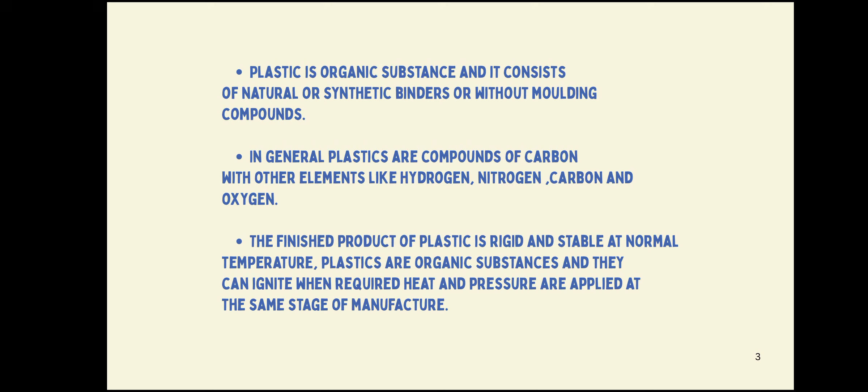Compounds. In general, plastics are compounds of carbon with other elements like hydrogen, nitrogen, carbon, and oxygen. The finished product of plastic is rigid and stable at a normal temperature. Plastics are organic substances and they can ignite when required heat and pressure are applied at the same stage of manufacture.

Polymerization. Plastics

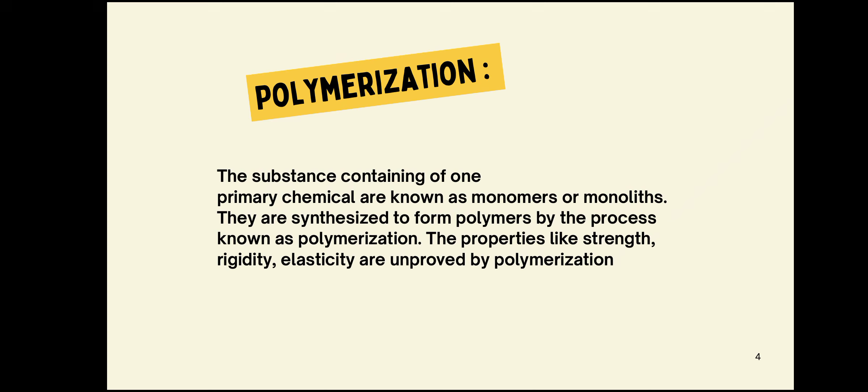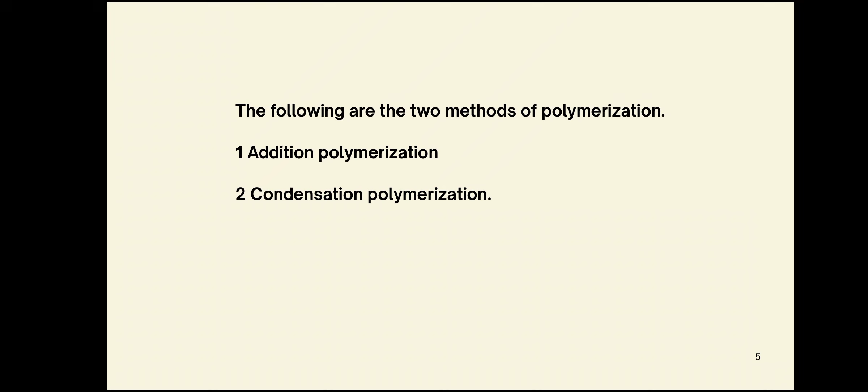Addition polymerization. In this method, different molecules join together and the molecular weight of the resulting polymer is equal to the sum of the molecular weight of the reacting molecule. This process involves three stages: beginning of the process, expansion of the chain, and end process. The polymers obtained in this method are polyethylene, polypropylene, polyvinyl chloride, polystyrene, polyacrylates, etc.

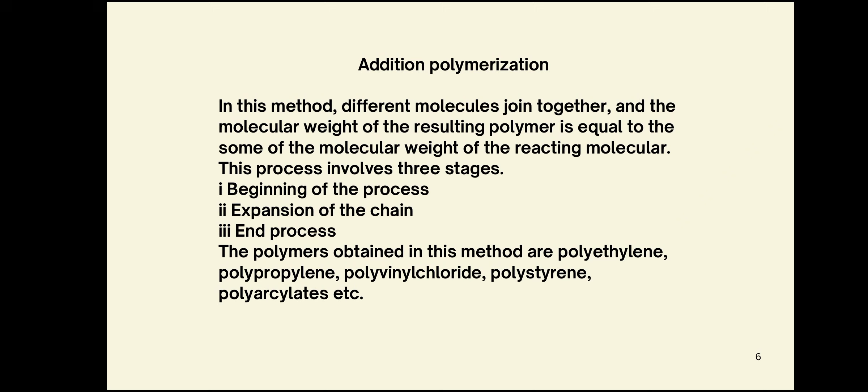Condensation polymerization. In this method, low molecular substances are removed from the high molecular substances formed from a large number of identical or different molecules. The reaction proceeds with an evolution of ammonia, hydrogen chloride, and similar other low molecular substances. The polymers obtained by this method are phenol formaldehyde, carbonate, melamine formaldehyde, etc.

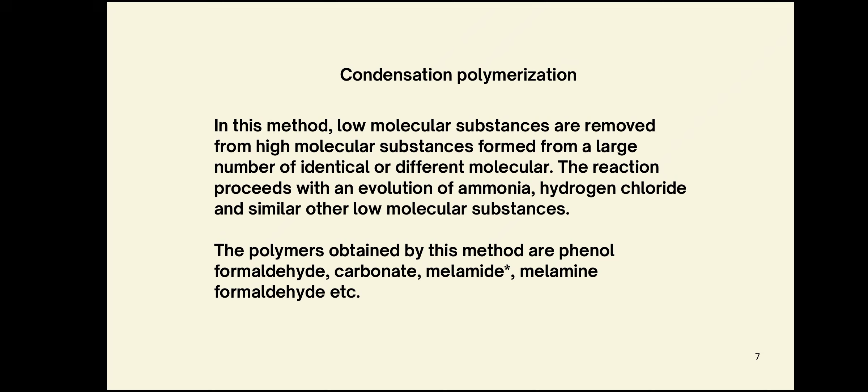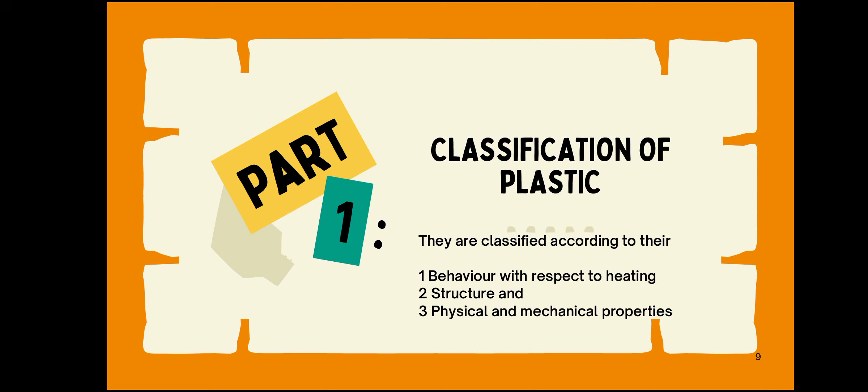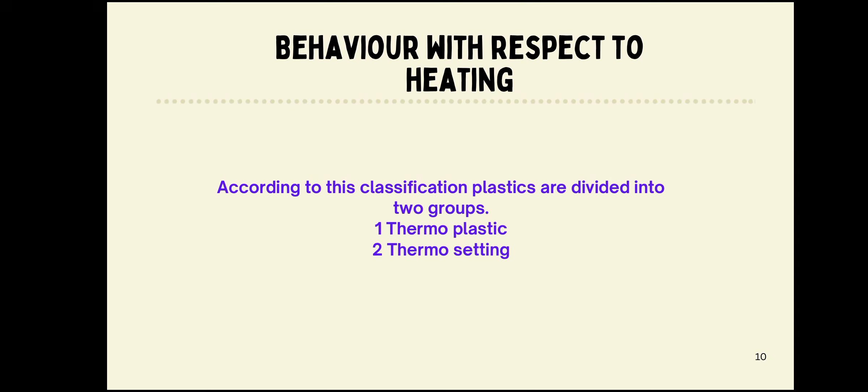Next one is classification, types and uses. Classification of plastic. They are classified according to behavior with respect to heating, structure, physical and mechanical properties. First one is behavior with respect to heating. According to this classification, plastics are divided into two groups: thermoplastic and thermosetting plastics.

Thermoplastic. The thermoplastic or heat non-convertible group is the general term applied to plastic which becomes soft when heated and hard when cooled. The process of softening and hardening may be repeated for an indefinite time, provided the temperature during heat is not so high as to cause chemical decomposition. So it is possible to shape and reshape these plastics by heat and temperature. The advantage of this variety of plastics is that the scrap obtained from old and worn out articles can be effectively used again.

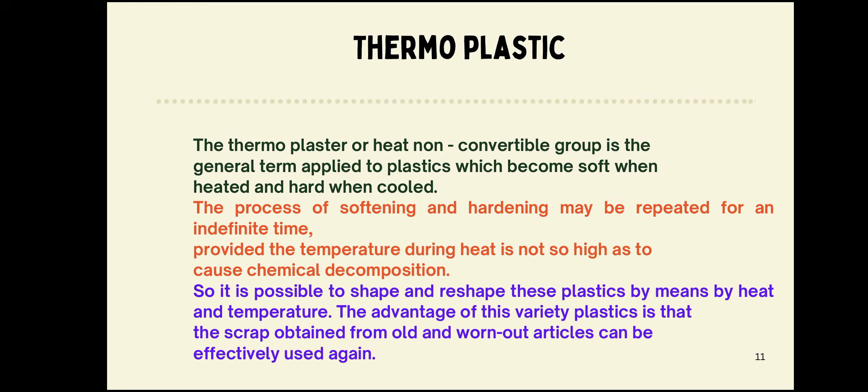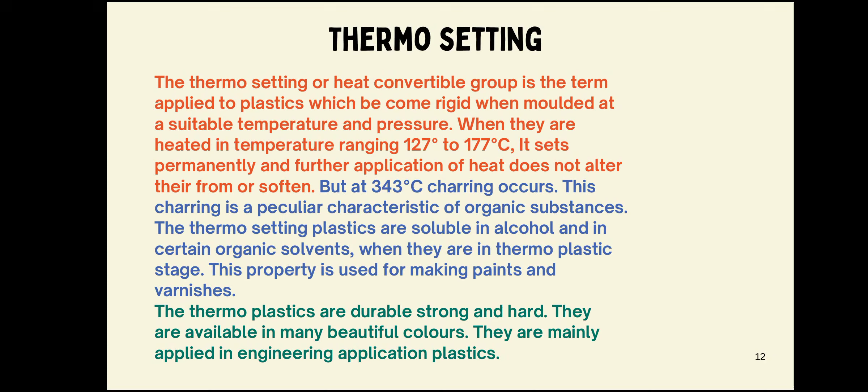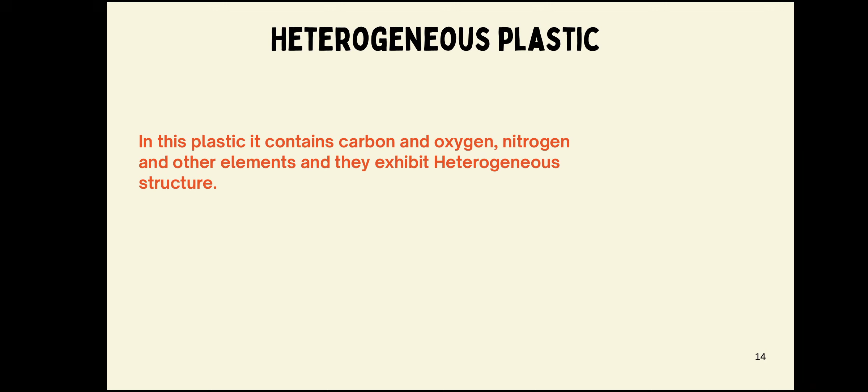Homogeneous plastics. The plastics of this group contain carbon atoms and they exhibit homogeneous structure. Heterogeneous plastics. This plastic contains carbon and oxygen, nitrogen and other elements, and they exhibit heterogeneous structure. Physical. Homogeneous and heterogeneous plastics are classification according to structure.

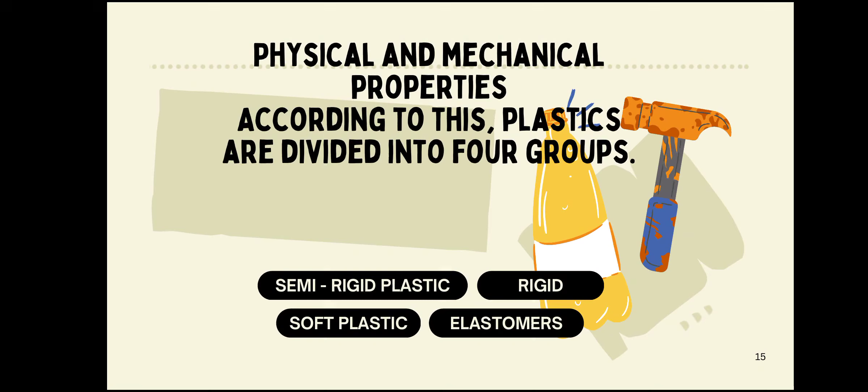Next classification is based on physical and mechanical properties. According to these, plastics are divided into 4 groups: semi-rigid, rigid, soft plastic, and elastomers.

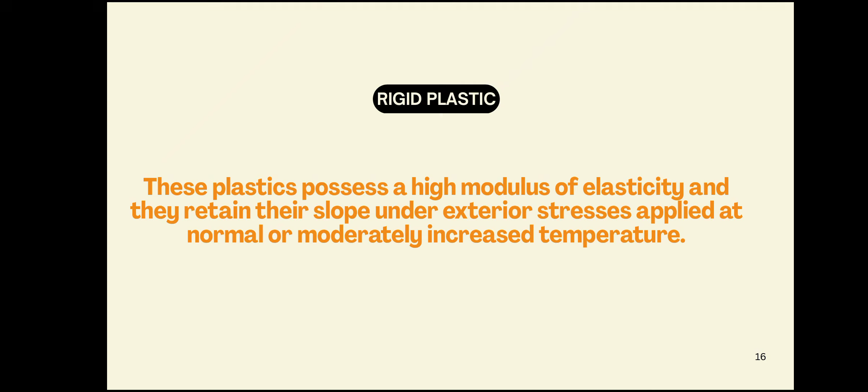The first one is rigid plastic. These plastics possess a high modulus of elasticity. They retain their slope under exterior stresses applied at normal or moderately increased temperature.

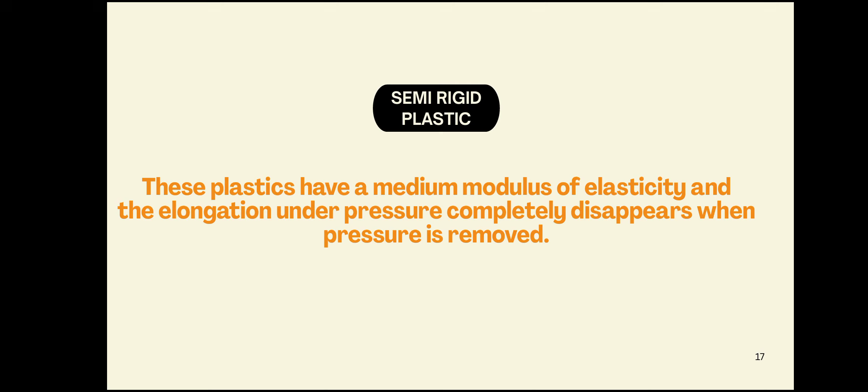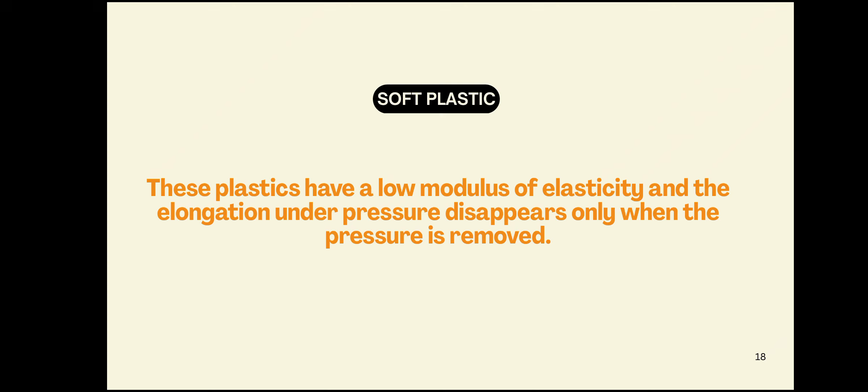Semi-rigid plastic: these plastics have a medium modulus of elasticity, and the elongation under pressure completely disappears when pressure is removed. Soft plastics: these plastics have a low modulus of elasticity, and the elongation under pressure disappears only when the pressure is removed.

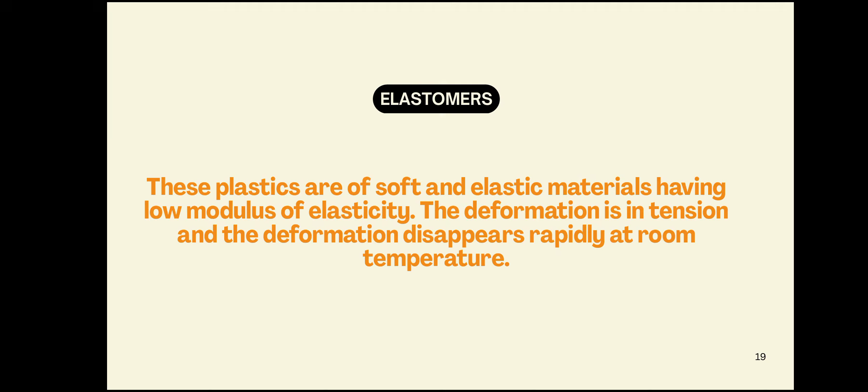Elastomers: these plastics are soft and elastic materials having low modulus of elasticity. The deformation is in tension and the deformation disappears rapidly at room temperature.

Properties of plastics. Appearance: some plastics are completely transparent in appearance.

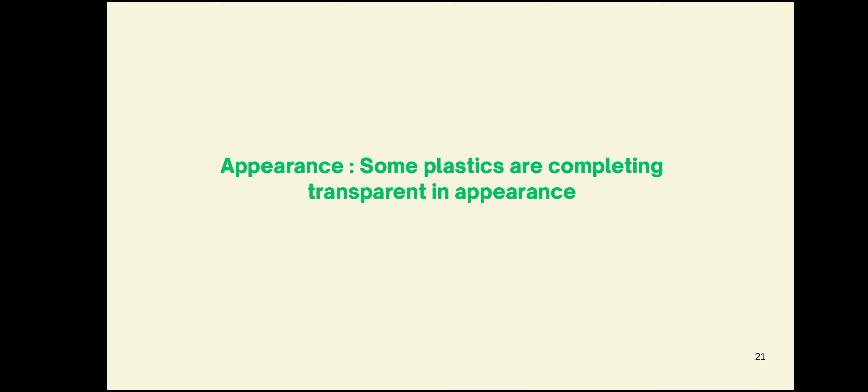Chemical resistance: plastics have great resistance to moisture, chemicals and solvents. Many plastics are found to be corrosion resistant and hence they are used to convey chemicals.

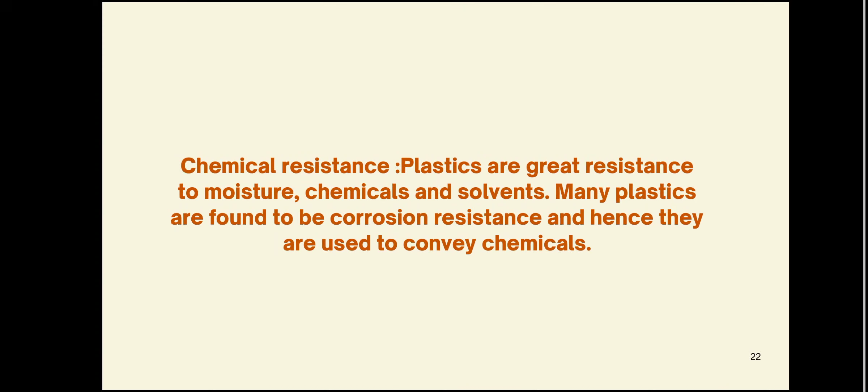Dimensional stability: this property of plastic is very satisfactory compared with that of other common engineering materials.

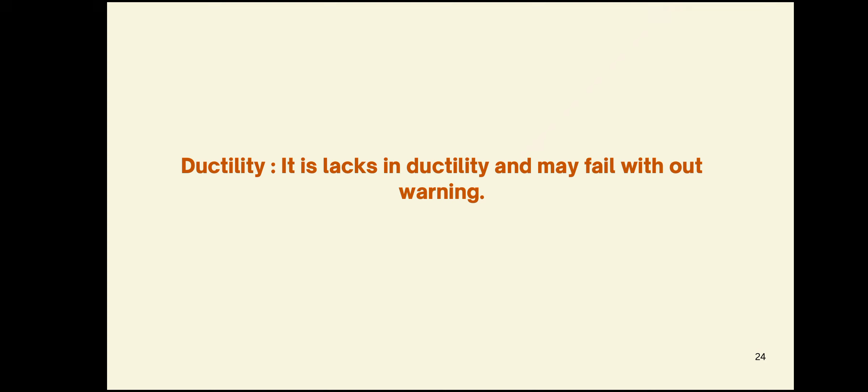Ductility: it is lacks in ductility and may fail without warning. Durability: plastics are quite durable and possess sufficient surface hardness. Electric insulation: plastics are superior to ordinary electric insulators.

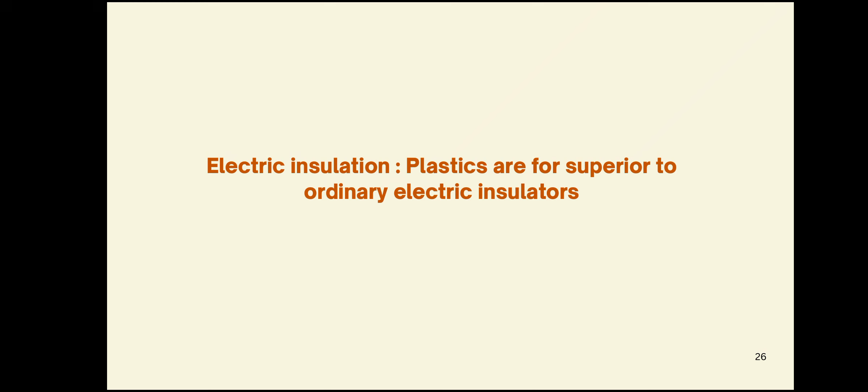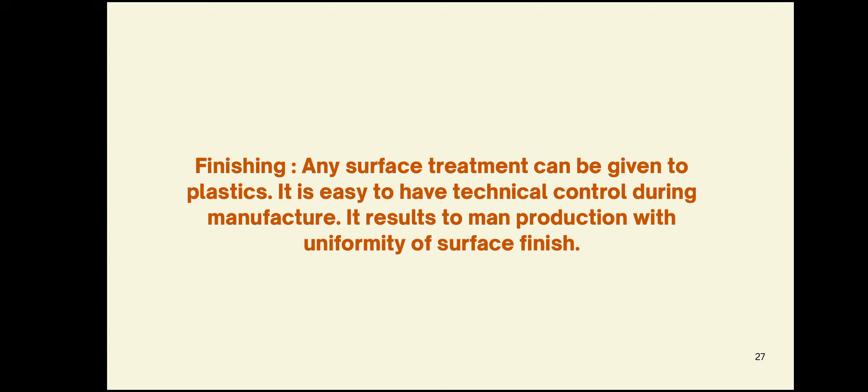Finishing: any surface treatment can be given to plastics. It is easy to have technical control during manufacture. It results in mass production with uniformity of surface finish.

Fire resistance: plastics are organic in nature and hence all plastics are combustible. Cellulose acetate burns slowly. Polyvinyl chloride plastics are non-inflammable. Phenol formaldehyde and urea formaldehyde resist fire and are used as fireproofing materials.

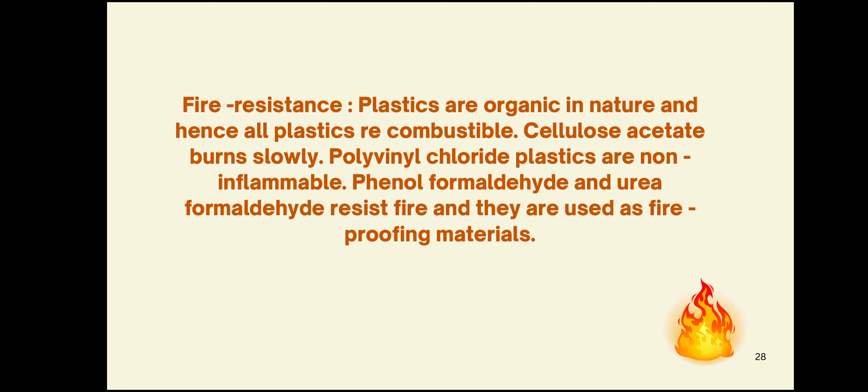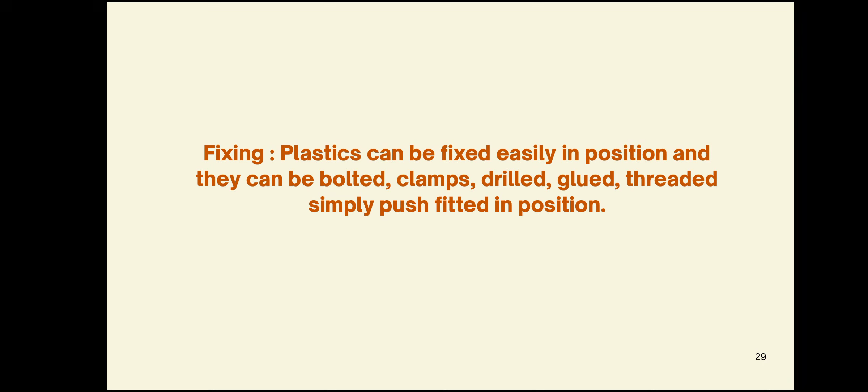Fixing: plastic can be fixed easily in position and can be bolted, clamped, drilled, glued, threaded, or simply push-fitted in position. Humidity: the properties of plastics are governed to some extent by humidity.

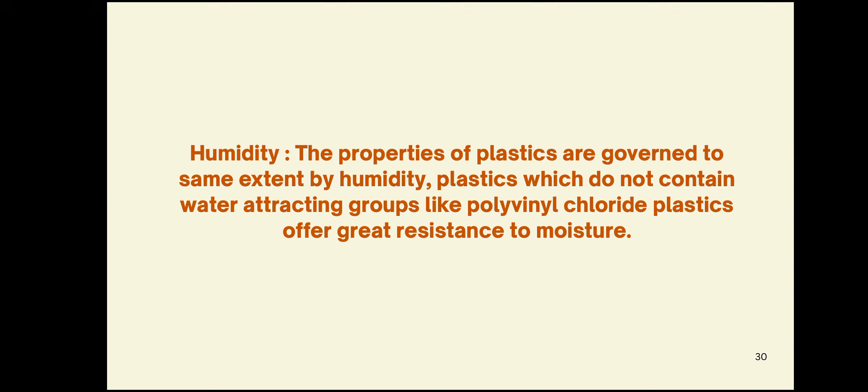Plastics which do not contain water-attracting groups, like polyvinyl chloride plastics, offer great resistance to moisture. Maintenance: it is easy to maintain plastic surfaces, and they do not require any protective coat of paint.

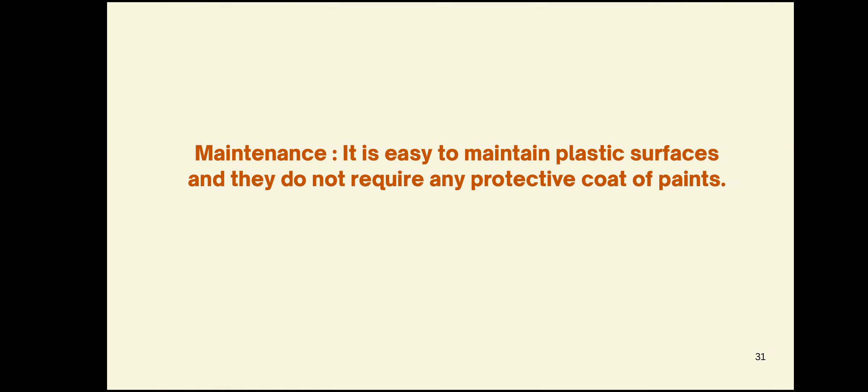Melting point: most plastics have a low melting point, and some plastics melt at 50 degrees Celsius. In general, it can be said that the coefficient of thermal expansion of plastic is 10 times that of steel.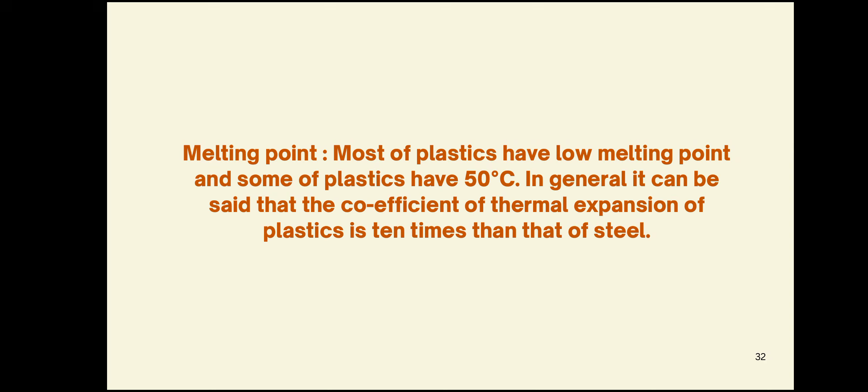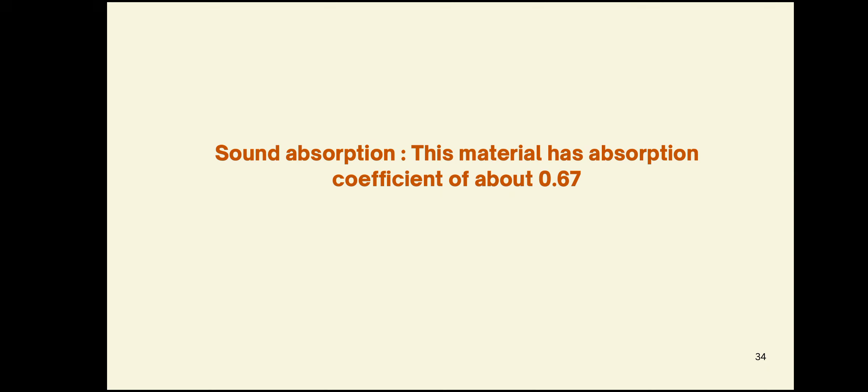Optical properties: several types of plastics are transparent and translucent. Sound absorption: the material has an absorption coefficient of about 0.67.

Strength: plastics are reasonably strong. Plastic members can be used as tensile members.

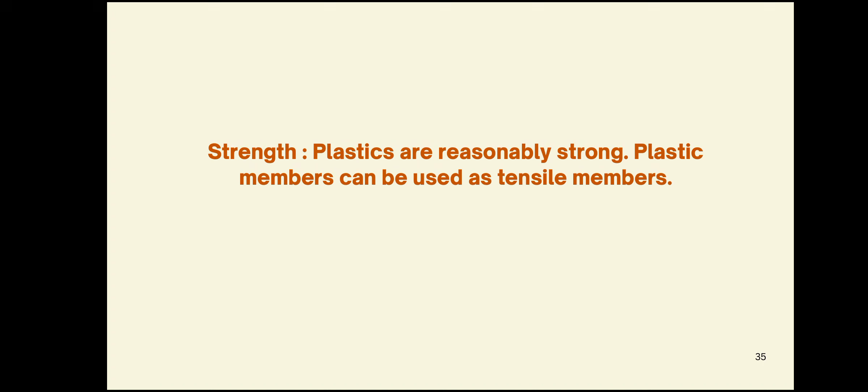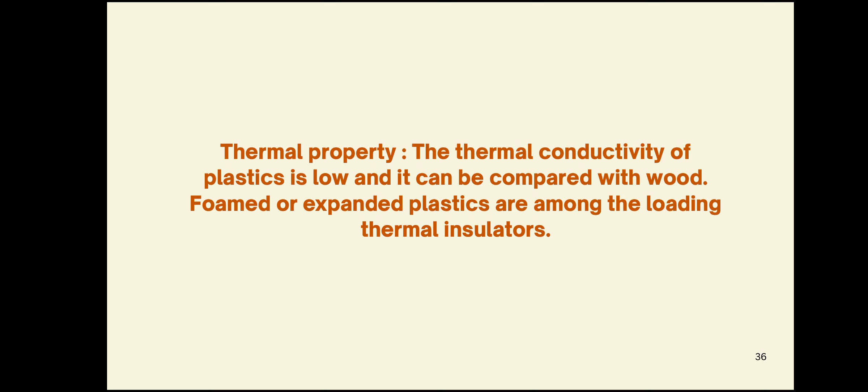Thermal property: thermal conductivity of plastic is low and can be compared with wood. Foamed or expanded plastics are among the leading thermal insulators.

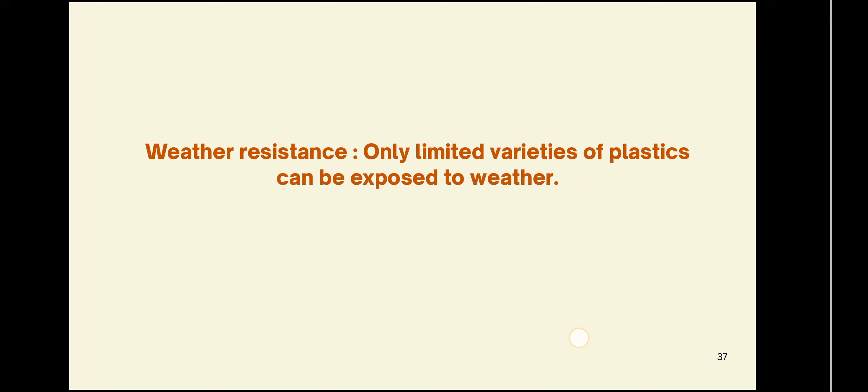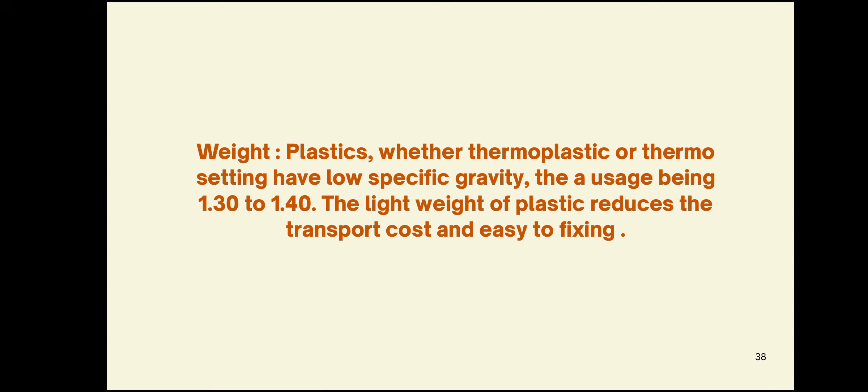Weather resistance: only limited varieties of plastics can be exposed to weather. Plastics, whether thermoplastics or thermosetting, have low specific gravity, usually 1.3 to 1.4. The light weight of plastic reduces transport cost and makes fixing easy.

Uses of plastic: the typical uses of plastic in buildings are summarized below: bath and sink units, cistern ball floats, corrugated and plain sheets, decorative laminates and moldings, electrical conduits, films for waterproofing, damp proofing and concrete curing.

Electrical insulators, floor tiles, foams for thermal insulation, jointless flooring, lighting fixtures, overhead water tanks, paints and varnishes, pipes to carry cold water, roof lights, safety glass, wall tiles, water resistant adhesives, etc.

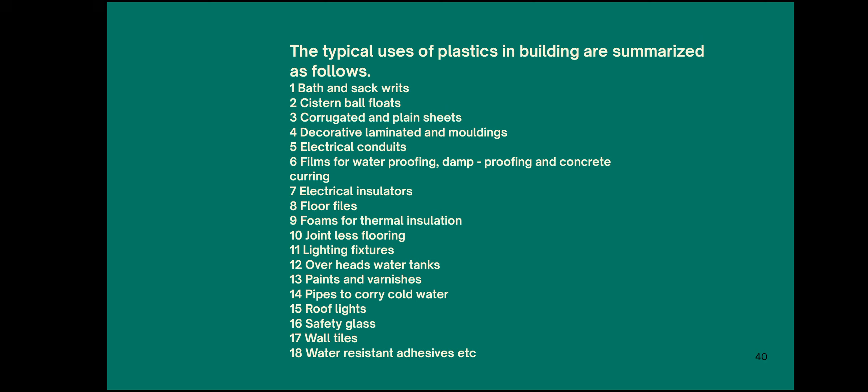Now, the advantages of PVC pipe.

They have good insulating properties, and hence the water passing through is not affected by the outside temperature. They have no problems of incrustation. They permit a high, smooth and uniform flow of water.

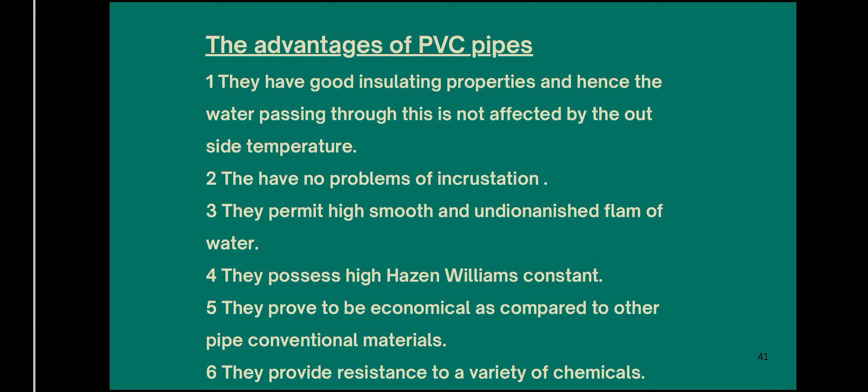They possess a high Hazen-Williams constant. They prove to be economical as compared to other conventional pipe materials. They provide resistance to a variety of chemicals.

Disadvantages of PVC pipes: they are liable to creep phenomena when installed above ground level. They cannot be used in high temperature. They do not have the same strength as cast iron or galvanized iron pipes.

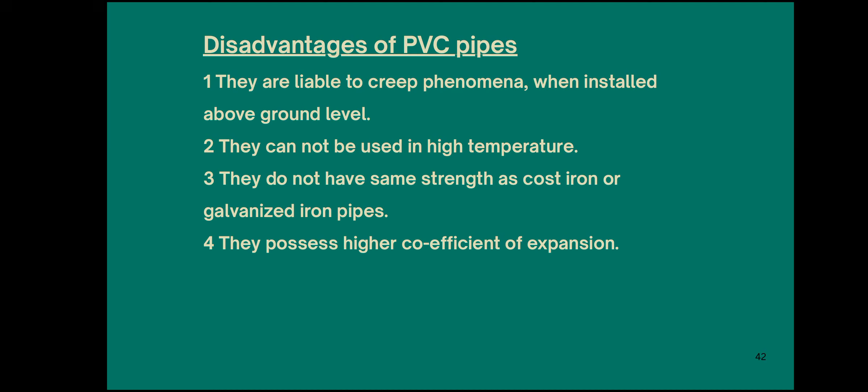They possess a high coefficient of expansion. Thank you.